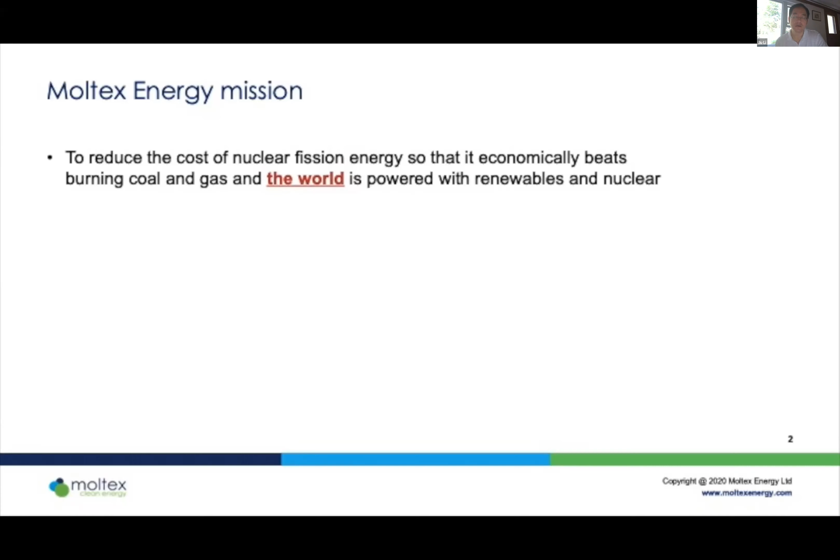The mission of Moltex is quite explicitly financial. We believe that nuclear energy will only make a real consequence to solving the global warming problem if it can be brought down to a cost where it is cheaper to use nuclear than it is to burn coal.

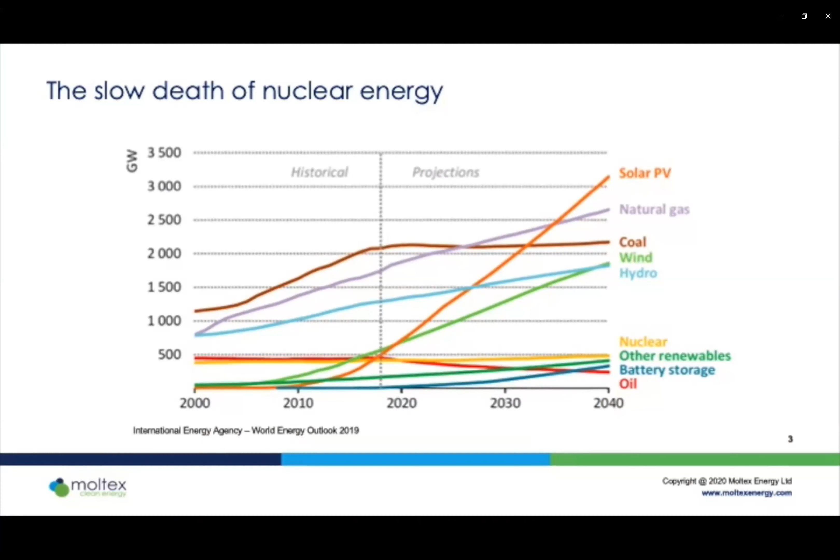And this is realistic projections based on current technologies and current policies. The really depressing thing on this slide is a yellow curve at the bottom shows nuclear, which shows nuclear not increasing in any meaningful way in terms of total gigawatts of capacity. This is not what the world needs.

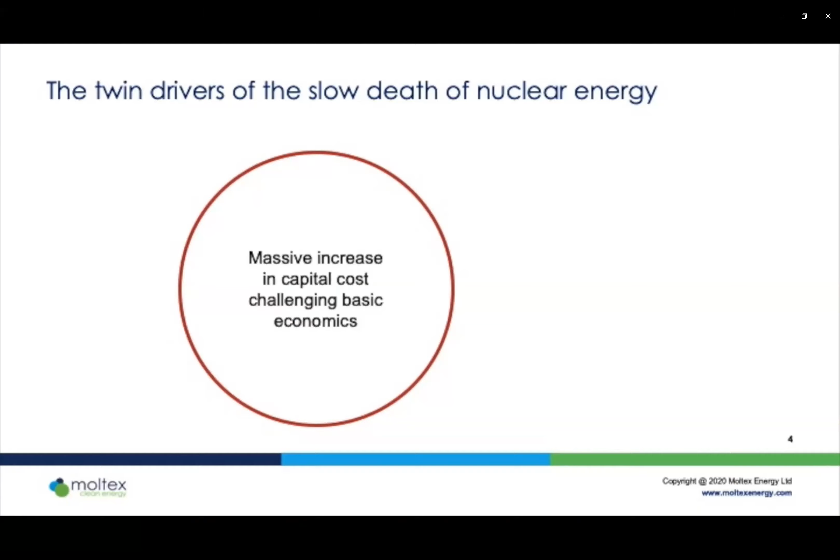So why is this happening? Why is the great promise of nuclear energy not being fulfilled? There's really two reasons, and this is a slide which is deliberately provocative: the twin drivers of the slow death of nuclear energy, because that is what we are facing now. The first driver is a massive increase in the capital cost. This is not news, but it is challenging the basic economics of reactors.

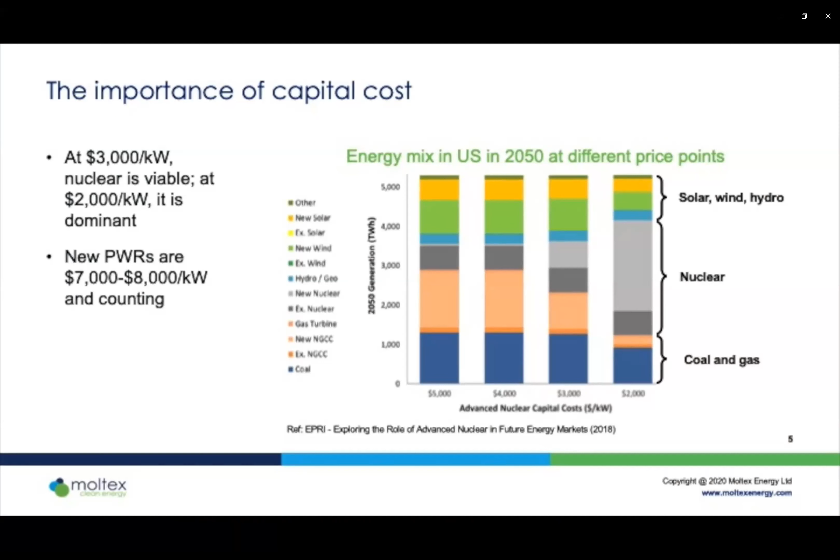There's a very good study came out from EPRI in the USA looking at how nuclear's penetration in the USA would evolve at different capital price points. The message is very simple. If you can get your overnight capital cost down to $2,000 per kilowatt, then nuclear becomes a dominant power source. At $3,000 per kilowatt, nuclear becomes a significant contributor to power. Above that, and nuclear is essentially irrelevant and will not grow, will not roll out.

Where are we compared to that $3,000 threshold for viability? Well, new pressurized water reactors are running at $7,000 to $8,000 per kilowatt and counting. That number is going up all the time. So that is only one part of the story.

The second important factor, which is just as important as cost, is that the electricity markets are changing as renewables become cheaper and cheaper and penetrate deeper and deeper into markets. Renewables generate power at zero marginal cost, and that means that they will produce whatever the market says. As a result, there are times when baseload demand is entirely met by renewables, and there is simply no need for a power generation source which is always producing 24 hours a day, 7 days a week.

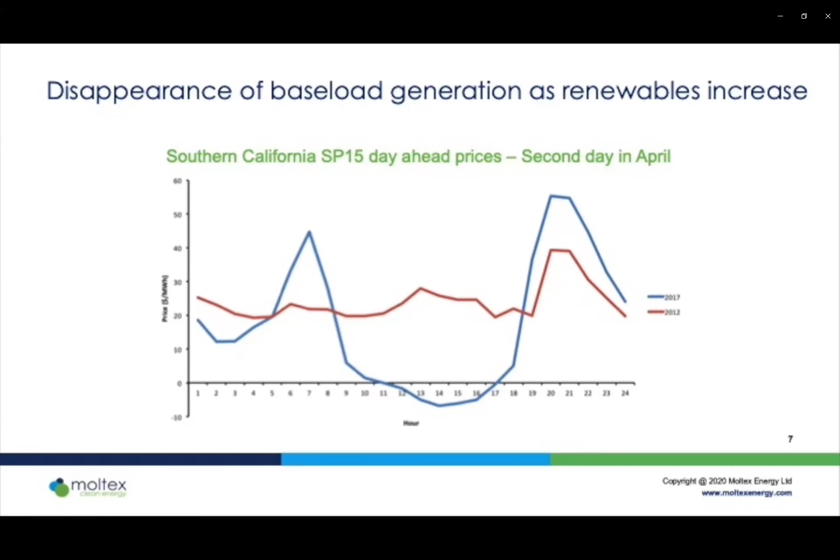And it shows 2012 in red and 2017 in blue. What's happened between 2012 and 2017 was a major rollout of solar power. And the consequence has been that around the middle of the day, prices were going negative. Generators were literally paying the grid operator to take their power. That's not a great business proposition.

One is nuclear. Nuclear cannot turn itself off quickly. The cost of coming back to power is too great, so nuclear will pay to have its power taken away.

The other contributor are renewables who have strike prices. If they're guaranteed £50 per megawatt hour, and they have to pay the grid £49 per megawatt hour to take the power away, they're still making £1. They will still produce, even though it's being produced at a clear loss. Such is the power of subsidies.

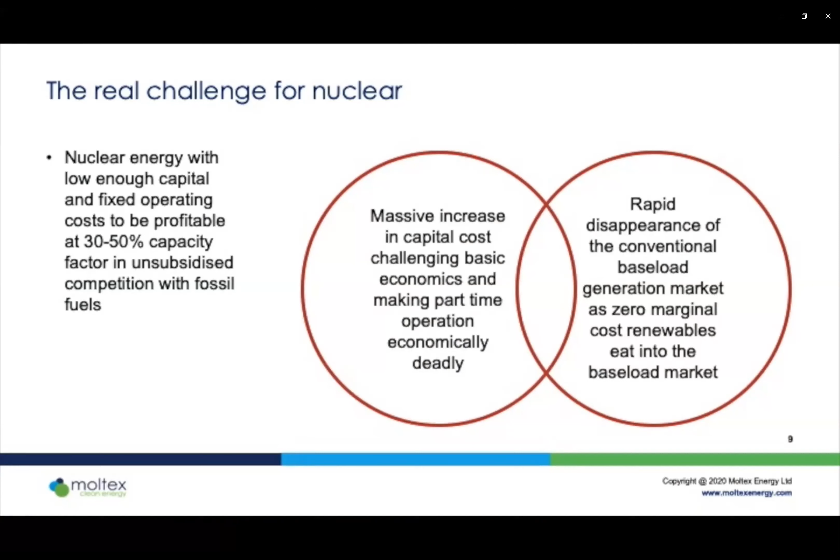So put these two things together, and what is the real challenge that nuclear has to address? We need it to have a low enough capital and fixed operating cost so it is profitable when it runs at between 30 and 50% capacity, and to be profitable in direct competition with unsubsidized fossil fuels. That's the target, and today nuclear is nowhere near achieving that target.

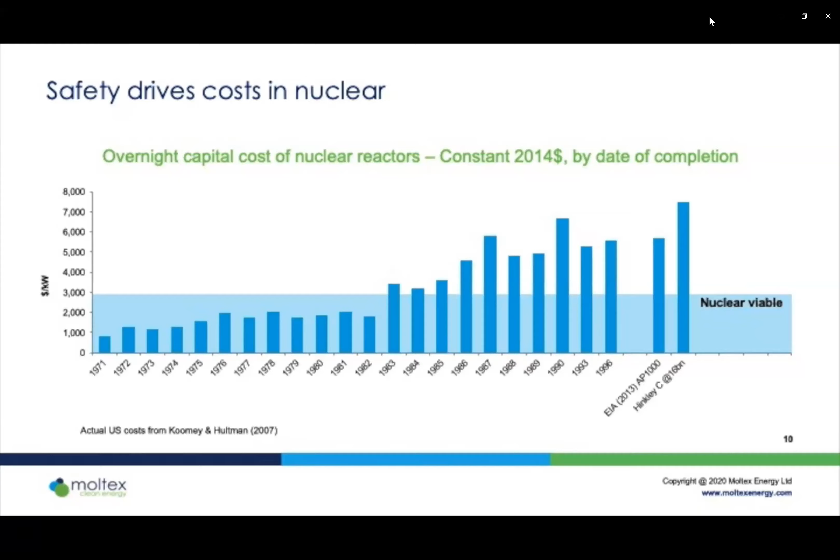So let's start with the solid fuel pellets. These are remarkably finely engineered structures. They trap the fission gases inside the pores of the fuel, and you have something like 50 volumes of fission gas to every volume of pellet, and the pellets are about 95% solid with only 5% void. That means you're looking at internal pressures of many hundreds of bar. And the pellets hold those in extraordinarily effectively until they don't.

And when they don't is when they reach about 1400 degrees centigrade, long short of any meltdown condition, at which point those pellets fall apart catastrophically, release large amounts of gas, rupture the tubes they're in, and release that highly radioactive gas into whatever containment you have around it. That's a fundamental hazard.

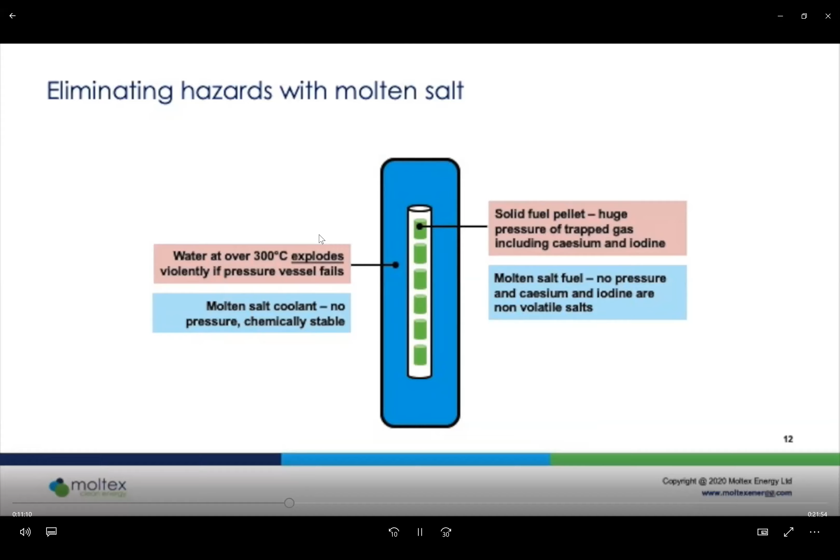The secondary use of molten salts is as a coolant. Replacing water with a molten salt coolant means that you have a coolant which is chemically stable, operates at atmospheric pressure, is not chemically reactive. At a stroke, you have eliminated two of the most important fundamental hazards of the reactor.

That means you are pumping an extraordinarily radioactive liquid at pressure around a relatively complex system with pumps, valves, heat exchangers, welded joints. And unless you've managed to produce the first plumbing system on the planet that can never spring a leak, you have to assume at some point there will be a leak. And then what do you do? It's a problem - not necessarily an insoluble problem, but engineering-wise, it's a very difficult problem.

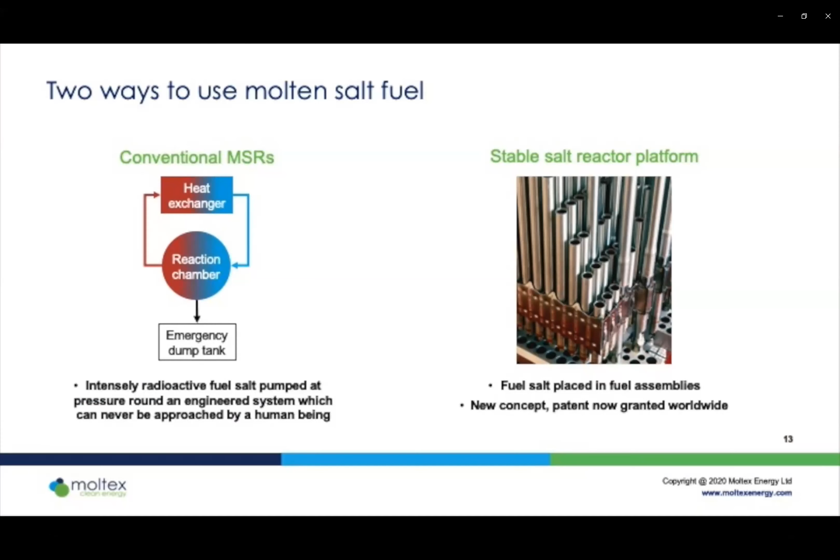The second way, shown on the right-hand side of this slide, is the stable salt reactor technology platform. This is the simple concept that you put the fuel salt into fuel tubes, rather similar to the fuel tubes used in conventional reactors. We're essentially replacing the uranium oxide with a molten salt.

This is, believe it or not, a radically new concept. The patent was filed in 2014. It is now granted in most of the major jurisdictions worldwide. It is genuinely novel, and has sailed through the patent process with very, very little difficulty. It seems extraordinary that the idea could actually be novel, but it is.

The reason it's novel is that it was actually considered back in the 1950s by the precursor of the molten salt reactor experiment, who considered putting molten salt fuel in fuel pins, because it's a pretty obvious thing to do. They concluded that it didn't work, and the reason they concluded it didn't work was that molten salts are actually quite poor conductors of heat, and they calculated that you couldn't get the heat out from molten salt.

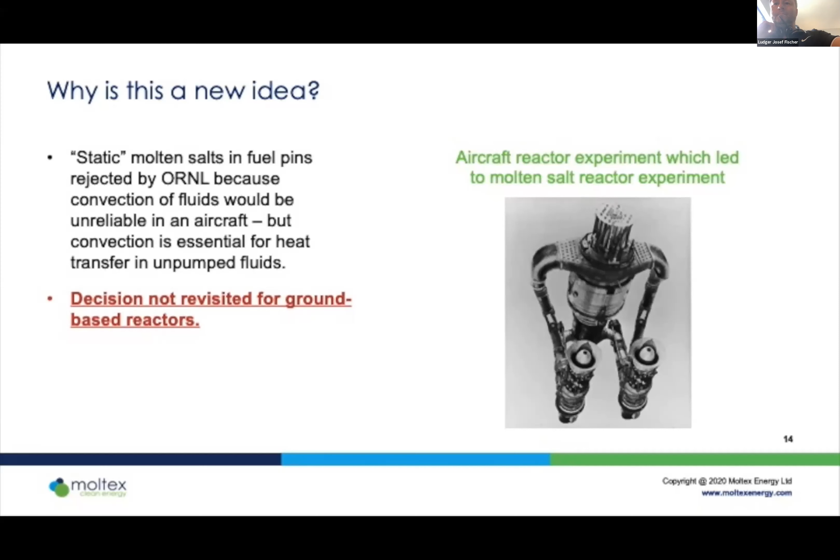However, what is not in the published literature is that their conclusion was based on ignoring convection as a heat transfer process in molten salts, and heat transfer in liquids is dominated by convection. They made that assumption for a reason: they were designing an aircraft powering nuclear reactor, which would have to be largely independent of the force and direction of gravity, so they had to ignore gravity for convection. That decision was never revisited when people gave up on the idea of putting nuclear reactors into aeroplanes.

Until we reconsidered that six years ago. So this is a platform technology - putting molten salt in tubes in a reactor is the basic platform technology.

There are two implementations of that platform that Moltex is currently working on. First is a fast spectrum reactor that we call the SSRW, where W stands for waste burner. It's a reactor fueled by higher actinides recovered from conventional nuclear fuel. It's a chloride salt fuel, and uses a zirconium fluoride-based coolant salt. It operates continuously with on-power refueling, and has completely passive emergency heat removal to the atmosphere. I'll talk a bit more about that reactor.

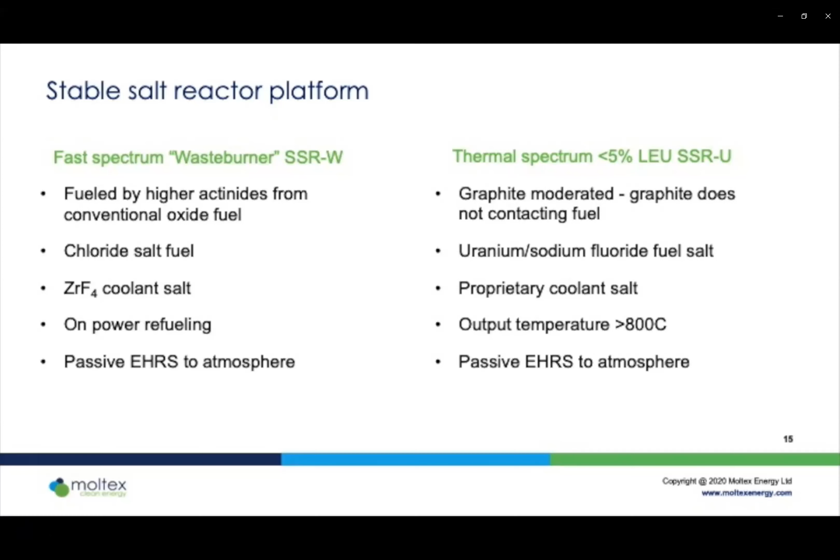The second one, which I'll say much less about, is a thermal spectrum version fueled by less than 5% low enriched uranium, conventional fuel supply, graphite moderated, but uniquely, I think, among molten salt reactors, the graphite does not contact the fuel. The fuel is a uranium sodium fluoride salt mixture. The coolant salt is proprietary - I'm sorry, I can't share what that is with you at this time. It has a very high output temperature, greater than 800 degrees centigrade, and again, entirely passive emergency heat removal. I won't say any more about the SSRU, the thermal spectrum reactor, at this stage.

So we founded this company in 2014. Progress on developing the SSRW since then has been quite rapid. The master patent was filed in 2014 and granted that same year the company was founded, which is unusual. By 2018, we had established Moltex Energy Canada and granted that company exclusive rights to the SSRW technology in North America. That same year, we signed an agreement with New Brunswick Power, leading to the development and deployment of this reactor at their Point Lepreau nuclear power plant's site.

Since then, we've been working hard with the CNSC. We have almost completed the vendor design review - that will be completed this year, phase 1. We've received major investments from both established nuclear companies, and we are getting significant support from Canadian government sources. We have also received very significant funding from the US ARPA-E research grants in the USA. So we have work going on at the US laboratories paid for very generously by the US government, which is a significant help, both financially, and there is some really excellent expertise there.

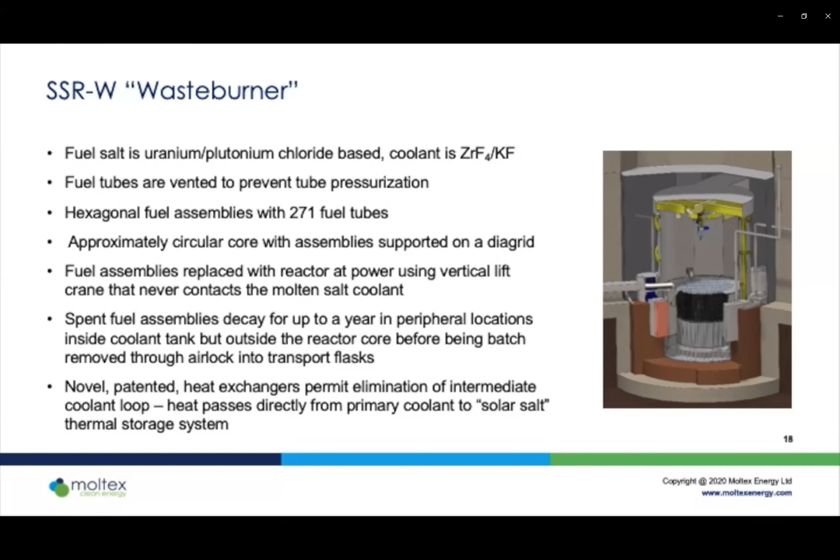A fuel assembly is taken out and then replaced. The ones that have been taken out are moved to the periphery of the reactor tank, where they decay for up to a year, and then removed as a batch through the airlock of the reactor into transport flasks for storage, disposal, or far preferably reprocessing, through a mechanism which I will describe a little bit later.

So now I'd like to talk about the fuel cycle. No use having a nuclear reactor if you don't have fuel for it. The SSR-W is fueled with reactor-grade plutonium and higher actinides recovered from existing spent nuclear fuel.

As everybody knows, reprocessing is a commercially non-viable proposition. Nobody's ever made it make economic sense. And we're not into commercially non-viable propositions at Moltex. So the fuel cycle is important to us. Let me talk about reprocessing.

Conventional reprocessing using variants of the Purex process is based on technologies designed to produce weapons-grade plutonium. That's its purpose, and it does it very well. It produces plutonium of extremely high purity, well north of 99.5%. In fact, if you're going to make MOX fuel for commercial reasons, you actually need that kind of purity. Those fuel pellets have to be very high specification, for all the reasons I said earlier in this talk. For that, you need high purity plutonium.

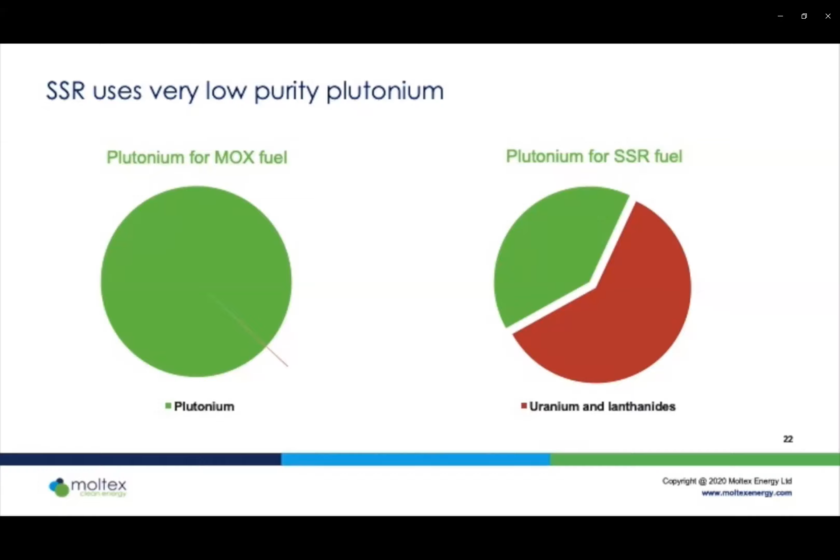SSR fuel does not require high purity plutonium. In fact, it doesn't particularly want it. The plutonium for the SSR can be contaminated with more than its own volume of uranium, and it can contain a substantial amount of lanthanides, which is important because lanthanides are the chemical that's actually quite hard to separate from plutonium. We don't separate it. The fact that we can tolerate this very low purity plutonium opens up options for reprocessing which just don't exist without the SSR-W reactor.

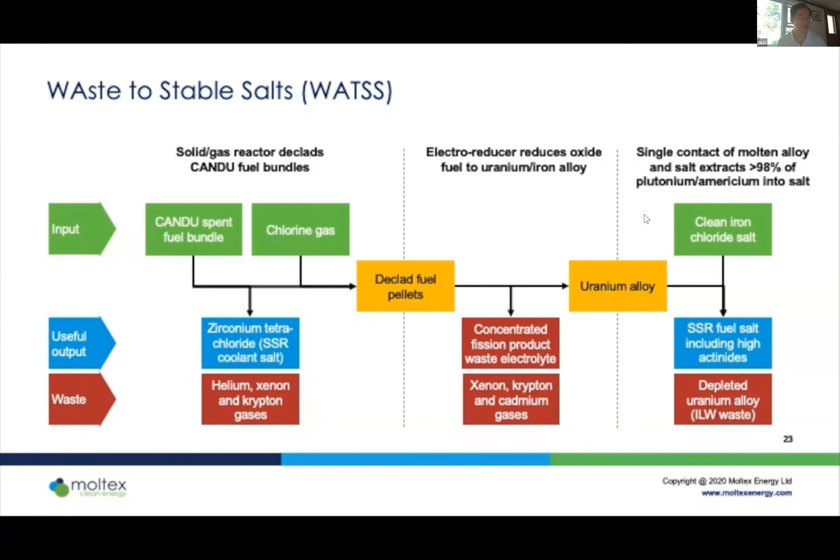We take these bundles, clad in zircaloy. The first step is we declad them using chlorine gas, a technology which was pioneered and demonstrated in US laboratories. This produces zirconium tetrachloride as one output, small amounts of gaseous waste from the pressurization gases, and uranium oxide pellets.

Those pellets are fed into an electro-reducer. The key novelty here is we don't simply reduce the pellets to uranium, we also add iron to the system, so they're actually reduced to a uranium-iron alloy. That's important because uranium-iron alloys melt at about 725 degrees centigrade, whereas uranium melts at 1100 plus, so it's a far more practical proposition reducing at that temperature range.

The output from the electroreducer is a uranium-iron alloy, which also contains the plutonium and higher actinides, a fraction of the lanthanides, all the noble metal fission products, and pretty much nothing else. The waste product from the electroreducer is a very concentrated electrolyte containing most of the radioactive fission products.

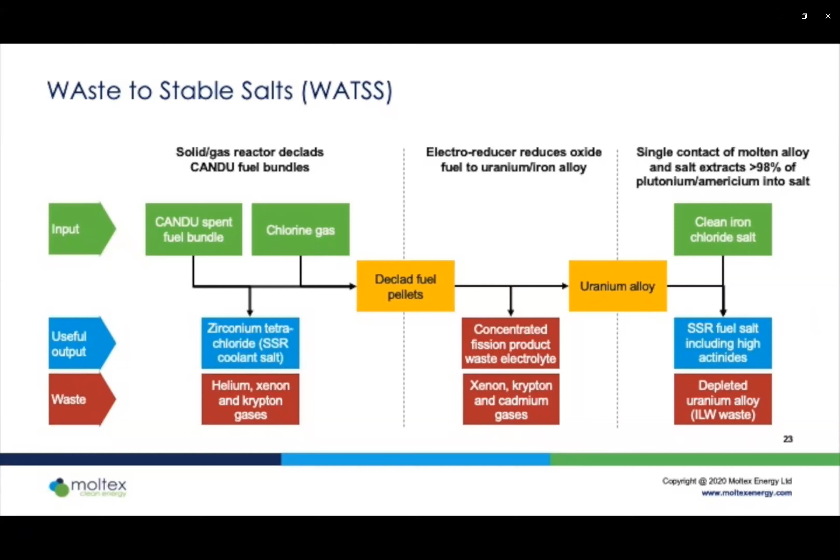The third step is to take that uranium alloy and extract it by contacting it with a clean salt mixture containing an iron salt. The iron exchanges with the plutonium and the lanthanides, and a small amount of the uranium in the alloy extracts those actinides into the salt.

A single contact will remove, or is predicted to remove, more than 98% of both the plutonium and americium into the salt. In our design, we have two successive contacts, so we recover essentially all of the higher actinides into the salt.

Looked at in overall terms, this process converts about 99% by weight of the spent fuel into uranium-iron alloy. This has essentially no decay heat, minimal radioactivity. It could be disposed of as intermediate level waste, or stored at surface locations for future use. It contains uranium, and at some point uranium is going to become a valuable material - it will be a store of value for the future.

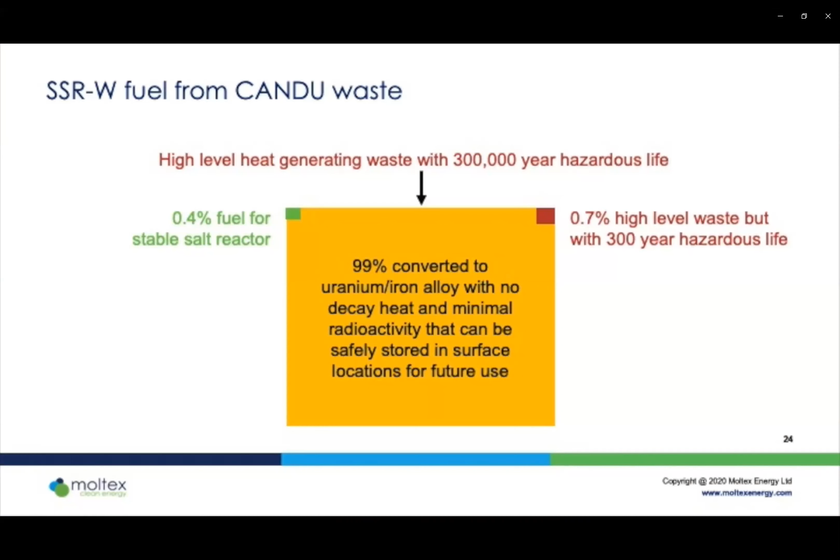The process produces about 0.4% of the weight of the spent fuel as our stable salt reactor fuel, and about 0.7% by weight as a high level waste, which contains most of the reactor fission products but has a relatively short hazardous life because it is essentially completely actinide free. Storage or disposal of that is something new to the nuclear industry, but is intrinsically a less difficult thing to achieve than for the original spent fuel.

I'd like to now talk about the third key technology in the Moltex proposition. We call this GridReserve, and this is cheap gigawatt-hour scale energy storage.

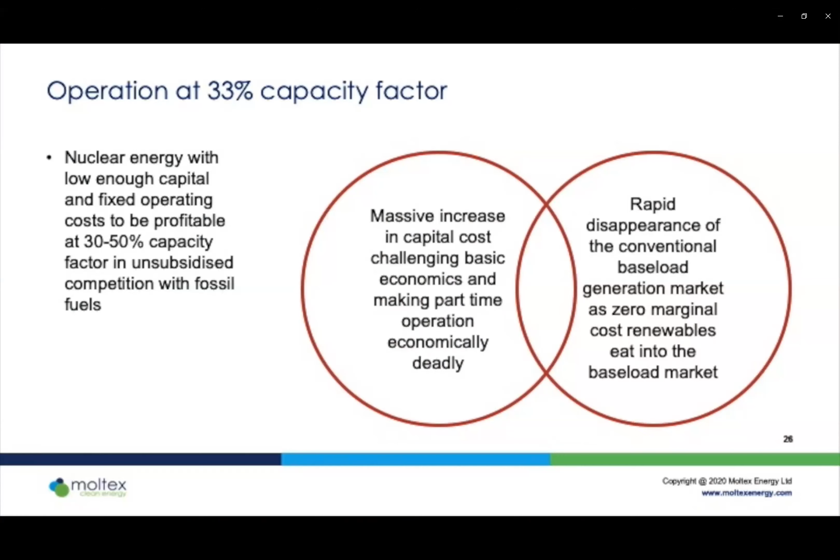Going back to the slide I showed earlier, the real thing we need to achieve is economic operation at something like 30 to 50% capacity factor. That is something which is challenging, but essential given the way electricity markets are evolving.

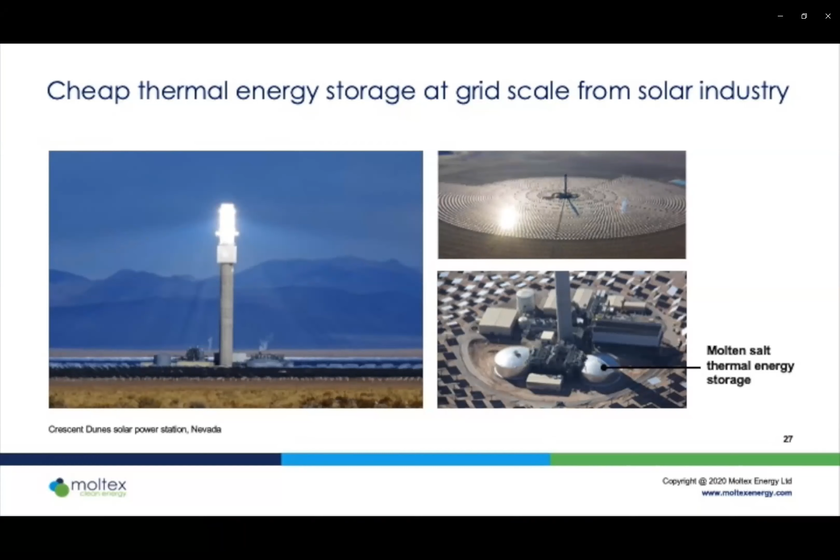The technology used for that is actually a molten salt - pure coincidence - it's molten nitrate salts, and it is a very cheap, very practical, and well-proven technology now. The picture on the bottom right of the screen shows the molten salt storage tanks associated with a solar power station. What we're using is essentially exactly the same.

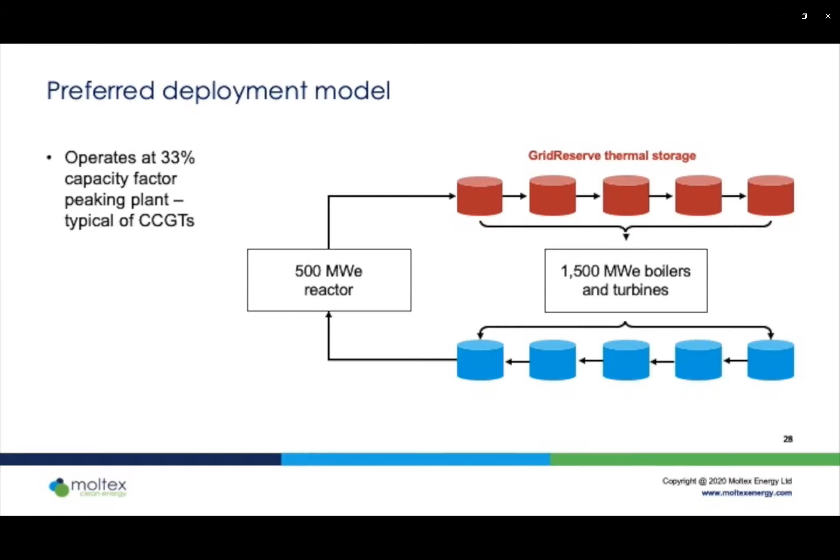This slide shows how we intend to deploy the SSR reactor. We'd have a 500 megawatt electric output reactor, so about 1250 megawatt thermal. That heat output goes into the GridReserve thermal storage tanks, and those will feed boilers and turbines in our base case design at 3 times the power capacity of the reactor. So we have a 500 megawatt reactor driving a 1,500 megawatt power station.

Looking at the numbers - and again, this is for the UK, every country will be different - over the 3-year period 2017 to 2019, the system selling price averaged over the whole period was £47 per megawatt hour. If you just sold your electricity into the best 8 hours of each day, that same electricity is worth £70 per megawatt hour. That's a premium of £23 per megawatt hour at a cost of adding in the GridReserve and greater turbine capacity of about £7 per megawatt hour. It is an economic and business no-brainer to do this.

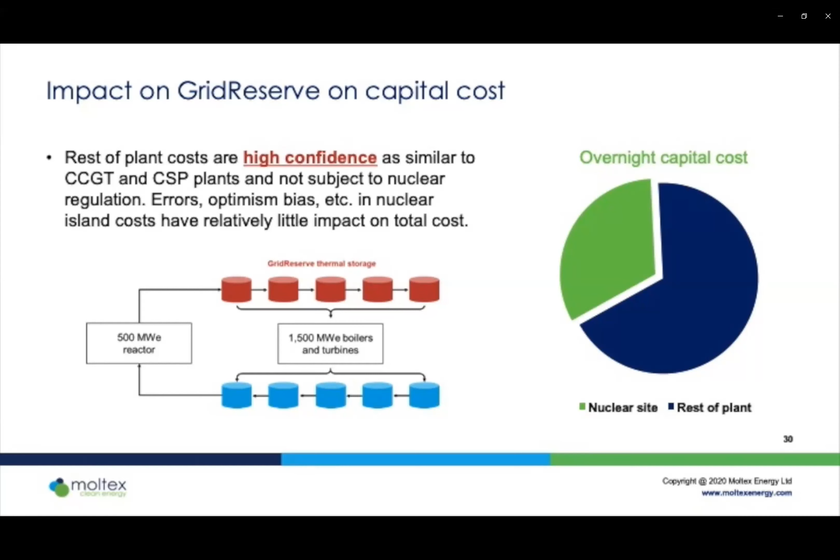So pulling this together, what does this mean? The economic benefits are, first of all, doing your safety right - eliminate the hazards, don't try to engineer solutions to those hazards. Secondly, use GridReserve so that you produce your power at the right time and reduce the nuclear fraction of your power plant cost.

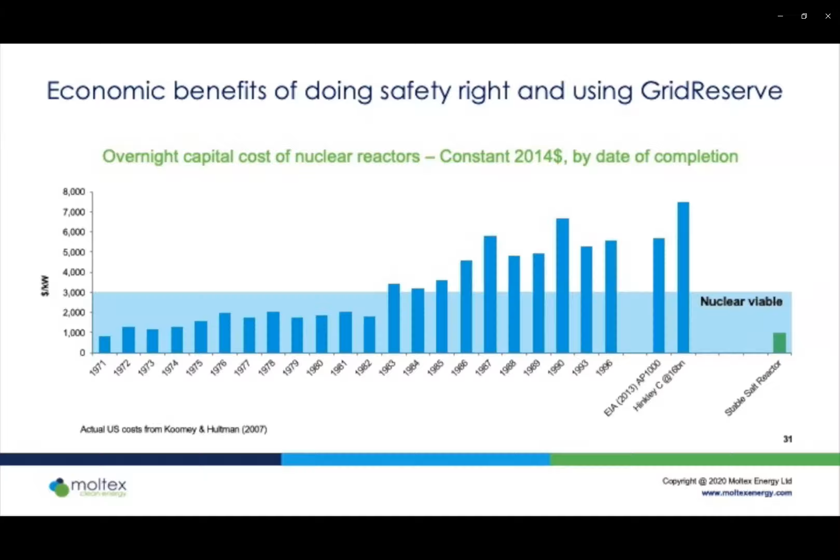This is the graph I showed before, showing how power plant costs have escalated over the last 40 or so years. The stable salt reactor is at the end there, in the configuration with a 1,500 megawatt output and a 500 megawatt reactor. You're looking at costs around $1,000 per kilowatt. That is extraordinary. Most important, you could triple the nuclear cost and still be very comfortably within the $2,000 to $3,000 region where you need to be for financial viability.

This is enormously important commercially. It reduces the risk of the investment by a very large factor.

So let me just summarize. The concept of putting molten salt fuel in essentially conventional fuel assemblies is a genuinely new concept. It eliminates a large number of the difficult engineering challenges that molten salt reactors face. The low nuclear island cost itself, coupled with the fact that the nuclear island is a relatively small part of the total cost, reduces the overall capital cost well below $2,000 per kilowatt, using conservative assumptions for optimism bias on our costs, with a really quite high confidence that cost will not be exceeded.

Thirdly, grid reserve, thermal energy storage, which I regret is available to everybody. I'd love it if we had that patented, we don't. Grid reserve makes nuclear energy a real partner to renewables in a market where renewables can produce electricity at essentially zero marginal cost. Energy storage is essential for commercial viability, and thermal energy storage is the way to achieve that.

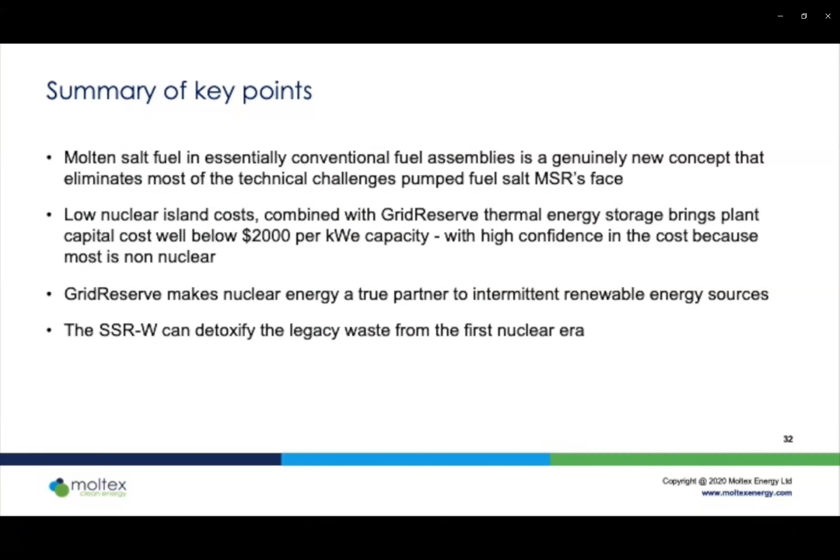And finally, and far from least, the SSRW, the waste burner reactor, can detoxify the legacy waste from the first nuclear era. That is something which is really quite important to developing the social license for nuclear in more countries. People worry a lot about nuclear waste. A solution that reduces its longevity and cost and potential impact on future generations goes a long way to make people accept nuclear energy. So I'll end there. Many thanks for your attention, and I hope you enjoyed the talk.